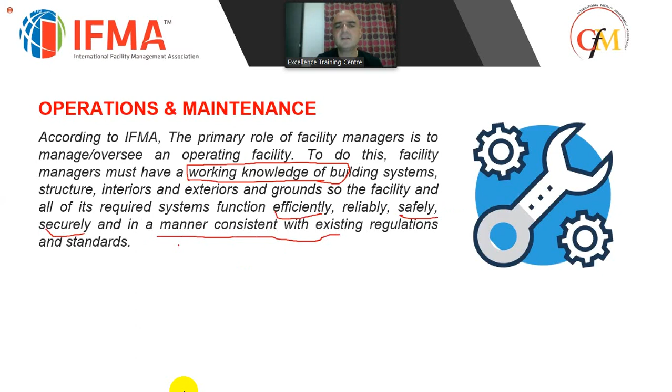So, operations and maintenance overview. What's the difference between operations and maintenance? Operations involves assuring that the facility's infrastructure provides a satisfactory work environment, complies with laws and regulations, meets financial performance goals, reflects efficient utility services and costs, and protects the surrounding community and environment. So operation is about looking at the facility's infrastructure.

So the whole facility's infrastructure, whether it's for the electric, water, or the building itself - is it a crumbling building or not? How does it operate? It says it provides a satisfactory work environment, or it might not be. In the case of an office, it can be a satisfactory work environment, but in the case of a hotel, it's what we call the mission essential function. Are we able to sustain, through our operations, the mission essential function of a hotel or a stadium or wherever?

Are we able to comply with the laws and regulations? So your operations - this is a key part of it. You cannot be expected to be a good facility manager, let's say operating in Qatar, and not really take into consideration the civil defense requirements or the Kahramaa requirements, the compliance, meeting the financial performance goals. Is my building really energy efficient? Am I really paying unnecessary costs? It reflects efficient utility services and costs, and protects the surrounding community and environment.

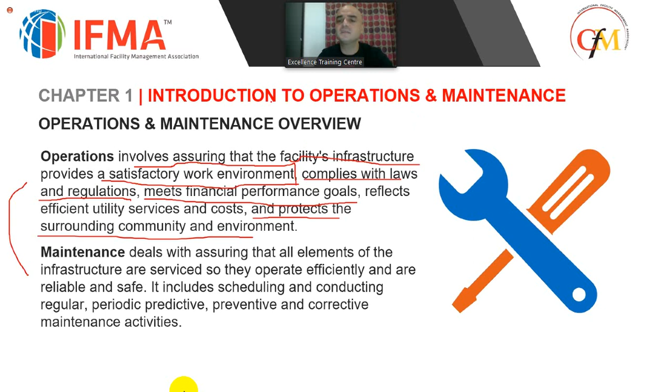And maintenance, we will see that we always prefer to make it much more routine as possible. There's always going to be some corrective maintenance, but if we're doing our preventive maintenance efficiently, we are reducing the likelihood of having unpredicted corrective or emergency maintenance.

So when we go into the systems, we start with the building infrastructure. What does the building infrastructure include? It consists of the building systems. Let's say it starts with the building structure - the structure itself, we will look into the definitions. The structure, which is the civil part, whether it's a wooden, steel, or concrete structure - this is the core of the building. This is the base, the skeleton of the building.

And then we talk about the building systems. What are the building systems? Building systems are the electrical and mechanical components of the building, or as we call them, the MEP in general. There are different types of building systems, we're going to be covering them. So if the building structure is the skeleton, the building systems are the core - they are the heart, the organs of the building. You cannot have a functioning facility without electricity running properly in it, or HVAC running through it. Of course it depends - I'm not talking about a cottage somewhere in a tropical place where you can live without AC.

But in general, functional buildings need to have these building systems in them. Interior elements—interior is also a part of facility management. This includes the furniture, the fixtures, and the equipment.

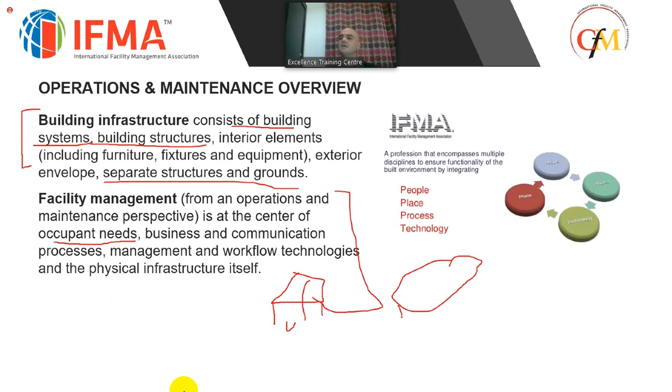If you have stadiums tomorrow for the World Cup, these are going to be heavily utilized buildings. These are going to be housing each one of them 80,000 people, with lots of systems there to secure. What's the mission essential function? It's to allow the players to have the match, to allow the spectators to enjoy it properly, to allow the TV cameras to record it properly, and to do so in an efficient and safe manner.

So it's like a huge operation, allowing people one or two hours before the match, or even more, to come and go in smoothly, go out smoothly. We have to do all of this without having security breaches or threat to the life of the people and of the players, and without having interruption.

So facility, I just gave this example—facility management is at the heart of these. If there's a problem with the infrastructure itself, if there's a shutdown in the CCTV systems, all of this will be compromised. So facility management is at the center of occupant needs. If you don't have this, you will not have the occupant needs met.

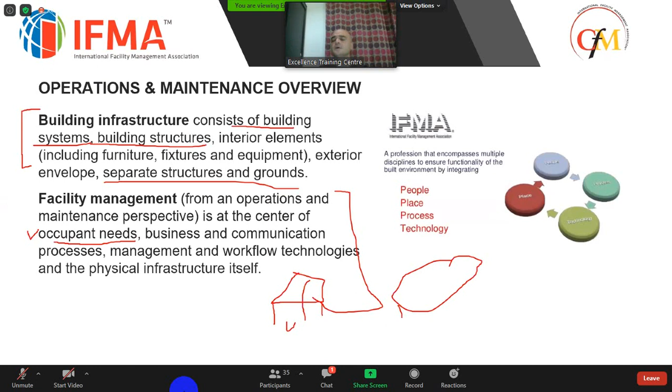Similarly, for a hotel, a 5-star hotel or any hotel for that end, a visitor is expecting to receive a certain kind of cleanliness, certain signs of noise control, smells—the whole experience. They're going for a hotel for a reason, to rest, or sometimes for recreation. So all of this, facility management is at the heart of.

To accomplish their duties, facility managers should have a detailed and complete management plan. Plans generally begin at a high strategic level and proceed to ever greater detail of tactics to accomplish the strategy.

We saw last time when we talked about strategy how we move from the general organization—what's the strategy of the organization? For example, we mentioned the stadium. So in Qatar, the strategy of FIFA and whatever—there's a certain level of quality required in terms of the operation of the facility. And because even if it's in Qatar, the country went out and beyond, and even the development of the facilities themselves, they are the first open, refrigerated or cooled stadiums in the world done at this scale. So if you look at the strategy, they want to create a wow, an impressive factor.

So for that end, the facilities are managed with that sense. They are not taking shortcuts. No one is taking shortcuts in anything. They are securing that whatever needs to be done has to be done, and that there is very low tolerance for lack of performance in any aspect.

To create O&M tactics, so we see how it goes from the general strategy up to the tactics—what are the tactics that are needed to accomplish the strategy? To create operation and maintenance tactics, facility managers must determine physical assets as an inventory, determine the maintenance and repair cycle. So we will see how, for us, to determine the tactics.

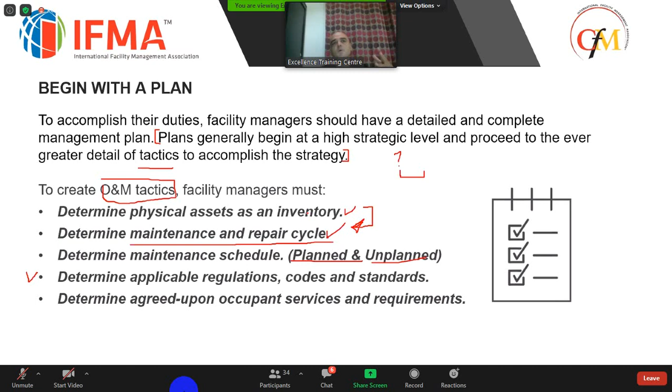So other than managing the core of the building, which is the systems, there are occupant services under facility maintenance, such as valet parking services, cleaning services, mail services, and concierge services. So what is within our scope? We determine the agreed upon occupant services and requirements—how frequently you want that, to what level, and so on.

Building structures are the construction elements that support. So we go into the definition of these items now—we start first with the building structure, the civil part of it. Building structures are the construction elements that support the architecture. They enable buildings to resist forces of users, nature, and the equipment that maintains the structure's living comfort. So it's the core structure of the building.

What do civil engineers do? They design to make sure the building can withstand the elements—nature like earthquakes, wind, rain, and the forces of users. If we are in a seismic-prone area, there are different regulations than in Qatar, for example. If I'm designing for an airport, I have much more load to take into consideration than if I'm designing an office space. So the size of the piling, the footings, and the foundation all depend on that.

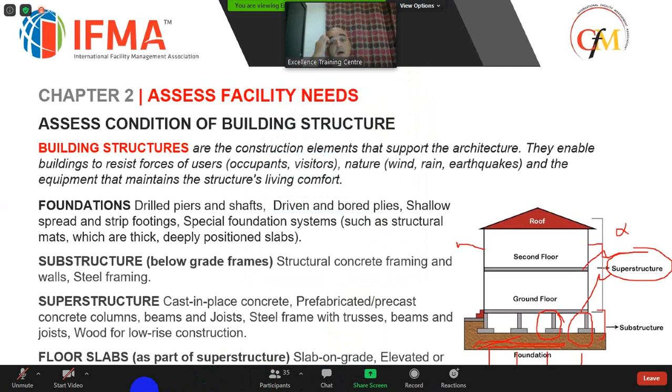When we are taking over—seven new messages, wow. Okay, means the basement, is it correct? Not really correct. The substructure means below grade, so the basement can be a part of it, okay.

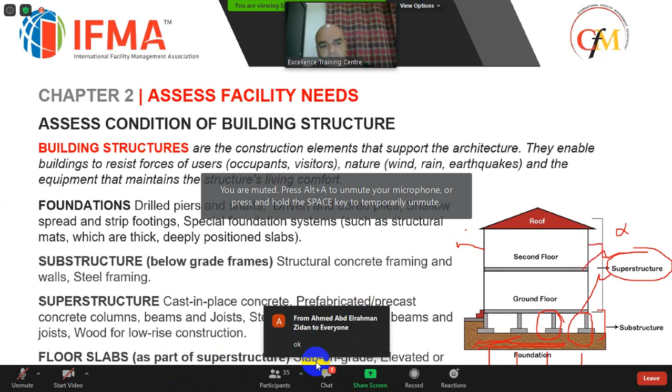Building structures are, so the first part, after we are taking over the building—the first part of operation and maintenance is that you take over. If it's a new construction and you are the developer, you take it from the contractor, and there's the defect liability period. Usually in contracting, after you finish construction, there's a defect liability period in which the contractor is bound to rectify whatever was there within a specified period—usually here it is 400 days.

Let's say it's an operational building and we went and acquired it—we were Coca-Cola, and there was a building in Qatar, and we went and acquired that building. The first thing we get is the asset list, as we said earlier. We looked at the equipment maintenance schedule. But it's very important to do a condition assessment, because irrespective of the age, sometimes a building which is 20 years old can be well maintained and will have a certain maintenance requirement going forward—very similar to a car.

When you buy a car, let's say a second-hand car, the frequency of maintenance and the way the conditions of the system will depend on the initial condition of the vehicle.

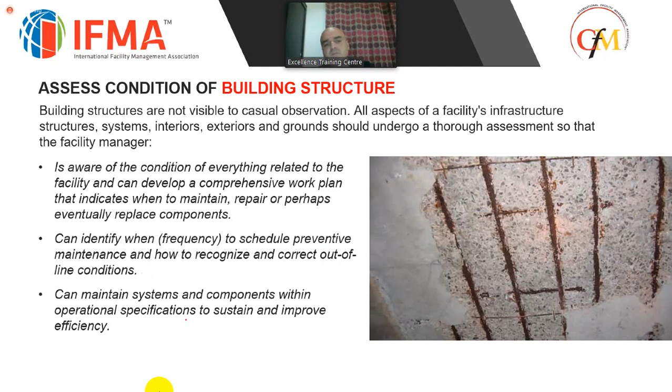Because we start from the initial condition and move on. It's also important to do that so that we can identify when to schedule preventive maintenance, and how to recognize and correct out-of-line conditions, so that we can maintain systems and components within operational specifications to sustain and improve efficiency.

You're not expected to be a specialized civil engineer, but you are expected to know the working knowledge of the terms and terminologies that we are using.

One of the most common things, as they said, is that in civil structures you cannot really see the foundation. Now you are sitting at home and you cannot see the foundation of the building. You cannot see the main wall. You can maybe observe them, but you cannot look at the conditions inside, what's happening.

But we look for signs of deterioration. These mainly happen as cracks in the interior and exterior works, cracks that are running diagonally along the mortar joints, and differential displacements of floor slabs or joints.

So if there's a shift in the structure, whether it's a steel structure or a wooden structure, again separation of corners at windows or where walls meet, standing water or pools collected near the facility during or after rain can be an indication. If we see a pool of water, why is it happening? Because supposedly when constructed, everything should be level and built in a certain inclination. So if there is pool collection, maybe there's an underlying structural problem beneath that.

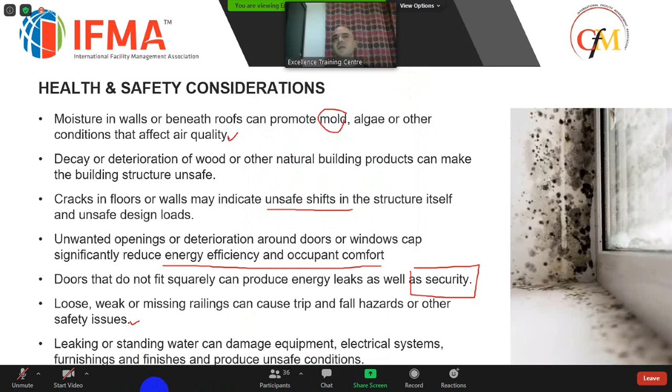Facility. Okay. Ahmad, maybe you're not having practical experience in that. All of these are under facility management. Client, someone who is running a hospital, okay, is not, it's operational now. You're used to construction sites. You know, the guy who is at the hospital, the general manager, understands absolutely nothing about facilities. So that's why he goes and hires a facility management company. And a facility management company will look at all of these things for them. Excuse me, facility management can estimate, but at the end, the facility management will not make renovation. They will try to convince the client to make a company for renovation.

Or is it from the role of the facility management under the responsibilities and duties of the facility management company? A facility management company can decide to destroy and demolish the building. They can hire the contractor. This is all under the scope of facility management. So you mean they have the authority, responsibility to say that this building cannot be lived in, we have to make renovation like that.

That's under the facility, under the authority. That's why you will see, one of the modules we were going to discuss is called project management. As a facility manager, you can be hiring other project managers. No one said that you have to do it. Some companies do it in-house, and you're saying that you need a contractor. I'm not saying no, yes, okay, you need a contractor, but who hires that contractor? Who tells the building owner that you need a contractor? Who is there every day on the building ground? Facility manager. Yeah, connection between the contractor and the client, like that.

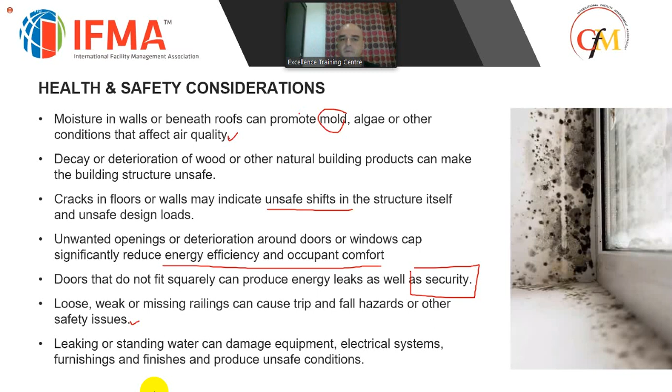Okay, so we're talking about the building envelope. This is much easier to spot the problems in a building envelope. Why? Because it's outside, it's visible. Some of it are not visible. For example, the roof conditions during rain and whatever.

So, for example, Ahmad, you can have a roof which needs a total replacement. Who can determine that? It's a function of facility management. Let's say one of the preventive maintenance that we can keep is that we can do a leak test of the roof, every 2 years. Based on the leak test, we go and say, either we need to do a partial repair or we're going to recommend replacement of the roof.

And it is gone now into operations. The building has gone into operations. It's not at the construction phase. You will need contractors, yes, not an issue, but who's handling that function is the facility management.

We're talking about facility management discipline, not necessarily the company which is handling it. So some common deficiencies to look for among exterior elements: deteriorating wall, roof, and other surface conditions. Cracks, peeling, rotting, moisture and condensation, spills, stains, ill-fitting or misaligned windows, poor joints, anchoring, ventilation, and lighting.

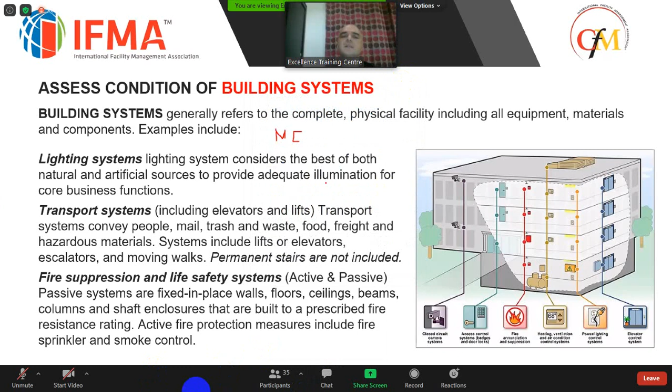So we continue, we look at the systems. These are the mechanical, electrical, and plumbing systems. The lighting system is one of them. Lighting system considers both natural and artificial sources to provide adequate illumination for the core business function. So the lighting system is not only the electrical part, the natural lighting is part of the lighting system.

Transport systems are systems that convey people, mail, trash, waste, food, freight, and hazardous material - so elevators, travelators, escalators. An important point: the stairs are not part of the transport system, as per the definition of IFMA. Fire suppression and life safety... Yes Firas? Garbage chute, is it a part of the transport system? Yes, trash. All right, thank you.

Fire suppression and life safety system - everything related to fire suppression, active and passive systems. What's an active fire suppression system and what's a passive one? Passive systems are items built into the design so they don't have to be activated to prevent a fire - this includes walls, floors, ceilings, beams. Even in Qatar, the civil defense regulates this; there are lots of passive systems. For example, if you have a genset in your building, you're supposed to put the diesel tank into a retaining wall around it, with 10% more capacity than the full capacity of the tank itself - this is a passive system, it doesn't have to be activated, it's in case there's a leak, it will contain it. Active systems, on the other hand, include fire sprinkler, smoke control, and the fire detection system - the active and passive fire alarm systems are part of this.

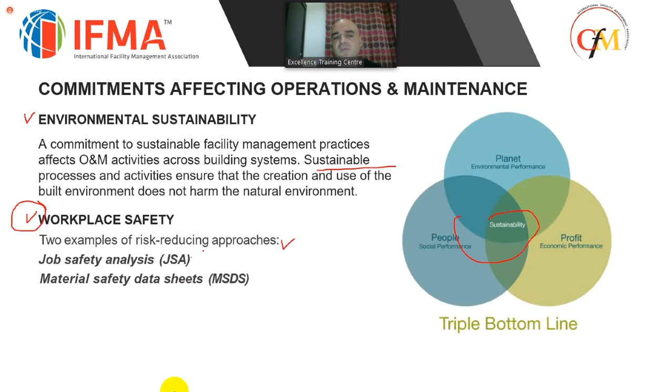So there we saw risk management for safety and job safety analysis, and the MSDS is one of the tools. We talked about the definitions in general, and now we talked about the mentality on how to handle it. Now we're talking about the other items.

So we're talking about interiors. What are the interiors? Facility interiors in general include all elements within a structure that are not actively supporting the structure. So what's an item that's not actively supporting a structure? Let's say partition walls, gypsum board walls, and so on - the partitions. They are not, their role is architectural, to separate rooms. They don't have any load-bearing part of it. So this is a definition of an interior.

A typical interior is a complex mix of different yet integrated materials, furnishings, fixtures, and equipment, as well as openings, including interior walls, windows and doors, ceiling systems, floors, and floor coverings. So any item inside the building that's not actively supporting the structure, as part of the facility, is called an interior element.

Acceptable indoor air quality - we saw in the facility module, in the sustainability module regarding the environment and quality - that indoor air quality is 2 to 5 times more polluted than outdoor quality. And because we spend 90% of our lives indoors, it's important to take care of that. It can be compromised if a building has been constructed so that air quality cannot be controlled and the amount of fresh air and humidity is limited.

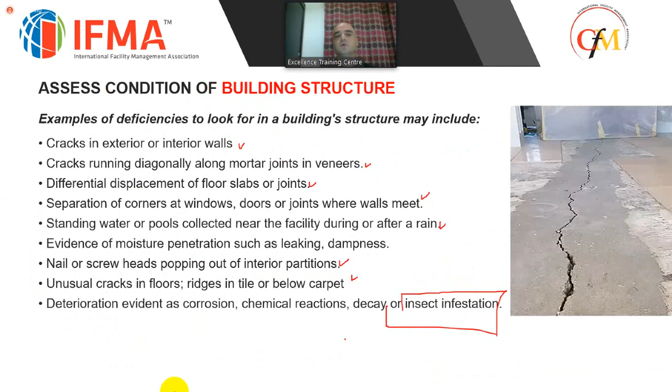So again, let me summarize. We looked at the structure itself. The structure is formed of foundations, substructure, and superstructure. Structure is the skeleton of the building.

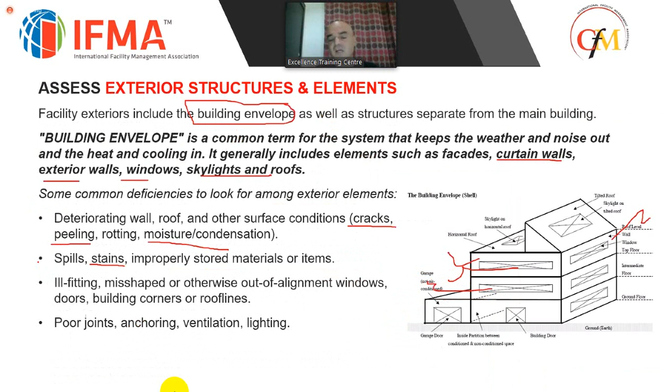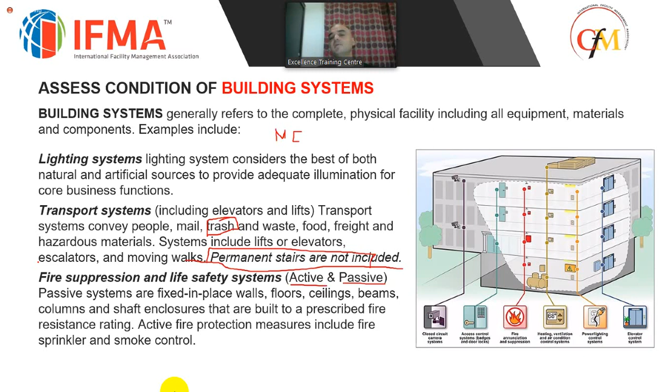Other than the structure, we have the building envelope. The building envelope is the outside doors, the roof, the aluminum cladding, the windows, the doors that are outside. And then inside of the building we have the building systems: the electrical systems, the mechanical systems, the power systems, the access control systems, the CCTV camera systems. All of these are part of the building systems.

We covered the whole building. Now we're looking at the nearby area, the grounds. The facility grounds include all exterior elements not attributed to separate structures, both landscaped and hardscaped areas.

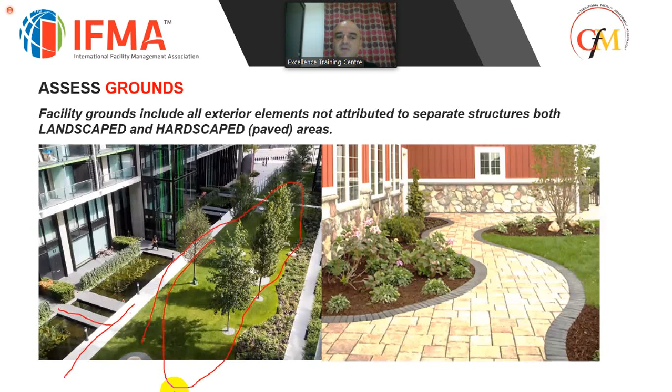Operations or maintenance are required for systems and equipment, and to support occupant need. So why is maintenance needed? Because it's made of equipment, and equipment needs maintenance—you need to check the equipment.

Facility managers refer to O&M for facility systems as hard services, and O&M for occupant need as soft services. So again, this is another definition of hard services and soft services. The hard services, per this definition, are for facility systems—things like lighting, temperature control, and so on.

And for occupant needs, such as the soft services—cleanliness is under soft services because it's related to occupant needs—mail services, valet parking services, concierge services, and so on.

Facility hard systems, such as the building structure, plumbing, electrical, HVAC, production equipment, represent a major portion of the organization's physical assets. It is the facility manager's responsibility to operate and maintain those assets. That responsibility begins when an asset is acquired.

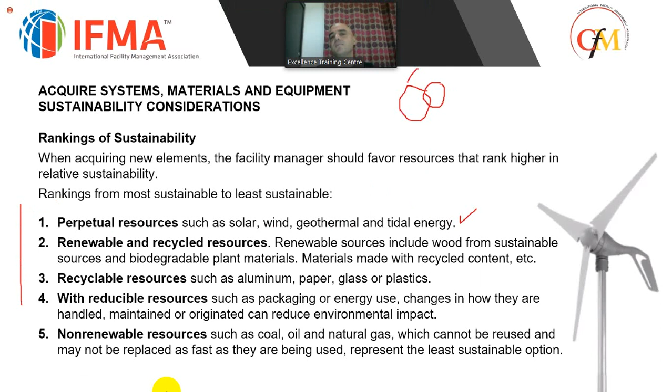So when we're deciding, we go by the rankings of sustainability. Perpetual resources such as solar, wind, geothermal, and tidal energy are our preference, of course. Remember, when we talk about sustainability, we talk about the triple bottom line. So something might be good for the environment, but might not look good from another angle.

What do you mean, Ahmed Abdurrahman? The budget of what, the perpetual? Depend on the budget, perhaps modification. Ahmed, what's the definition of sustainability as per IFMA? Sustainability, maintaining... yeah, because perhaps I have no budget for making a modification, which one is better? What you're talking about is the operations now, the decision whether to hire from outside or do it in-house. That's what you're talking about. No, what I mean is the budget is what controls me at the end, the money. If I have some budget I can make more modifications; if I have no budget, I have to restrict myself to my budget.

For sure, there's a budget for a facility—that's why you learn about facility management as a budget. Every facility has a budget, and yeah, definitely it impacts the decision. Many modifications, as you said, to a device—I can make it better, I can buy a different one, I can use more technology, more high tech.

Yeah, more, but Ahmed, you're forgetting something. The definition of sustainability as per IFMA means the triple bottom line. If you remember, it's here on the slide: profit and the economic part is one of it—it's not only about the environment. We said it should maintain the environment, make commercial sense as per your budget, and not affect the comfort of the people. That's when a practice is truly sustainable.

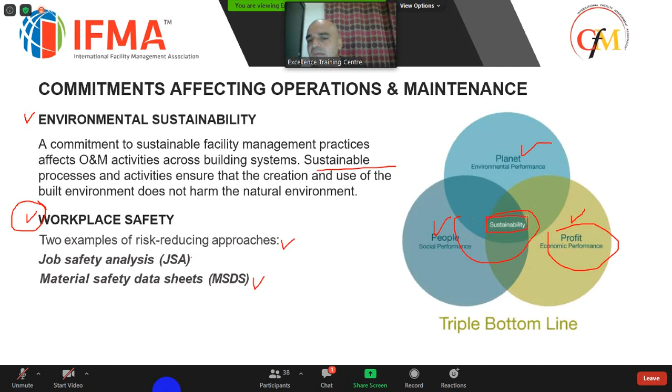Okay, so I will continue. Ranking of sustainability—it says here it should favor resources that rank higher in relative sustainability. IFMA has a very practical approach towards sustainability. They tell you to adopt sustainable practices, but of course take sustainability's full definition into consideration. As I said, if we're only looking at sustainability, then all buildings in the world would be operated by solar power because it's a perpetual, free source. But that doesn't necessarily meet budget requirements, and this is where it fails. A truly sustainable practice is one where all three elements are maintained.

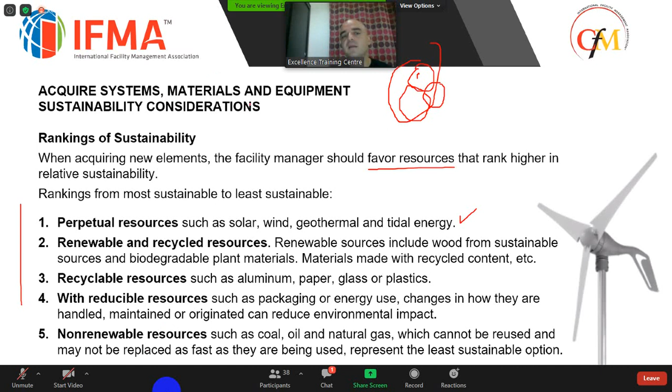Perpetual resources are the most preferred for sustainability. Then we go to renewable and recycled resources, then recyclable resources, then reducible resources—items with less packaging and how they are handled; sometimes the packaging of a material is made from recyclable items. The final and least preferred category from a sustainability perspective is non-renewable resources—coal, oil, natural gas—which cannot be reused and create environmental impacts in terms of emissions and so on.

Installing systems, material, and equipment. What's the definition of commissioning?

Yalla, Ahmed, you're coming from construction. What's the definition of commissioning? Commissioning is the same as testing.

Okay, fine. Firas, you wanted to put the definition of commissioning? I didn't come from a construction company, but I believe it's the testing of the equipment and the integrity of the equipment, if it's working. This is the commissioning.

Muthu Kumar, you wanted to give a definition also? Yeah, so commissioning is a part of transitioning a new system to operation.

Okay, let me clarify this a little. There's a misconception. Commissioning, yes, means testing - it's called testing and commissioning. But more importantly, when we are testing and commissioning, it's not only that we want to make sure the equipment is operational. Commissioning by definition is the process of evaluating, verifying, and documenting the performance of facility systems to ensure that they function to the intent of the design.

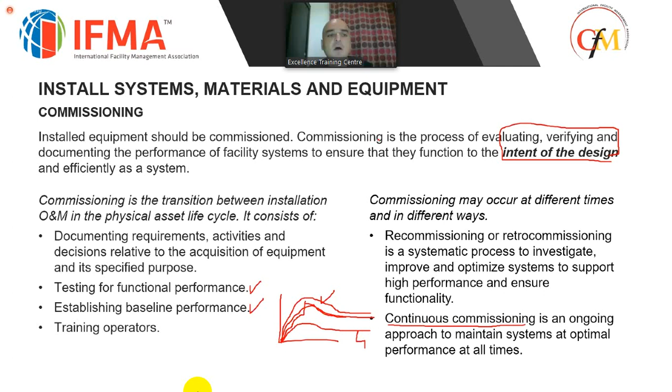Maintenance - so why do we do maintenance? What's the time now?

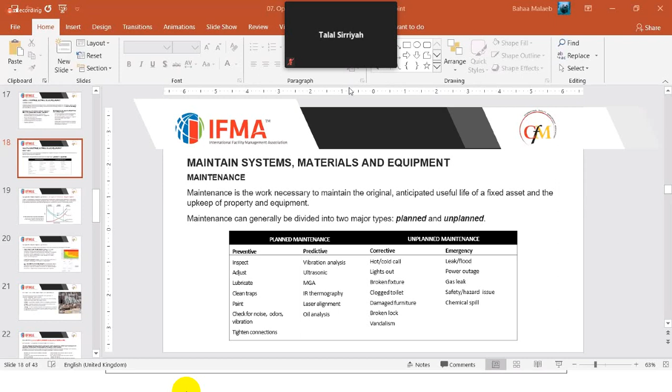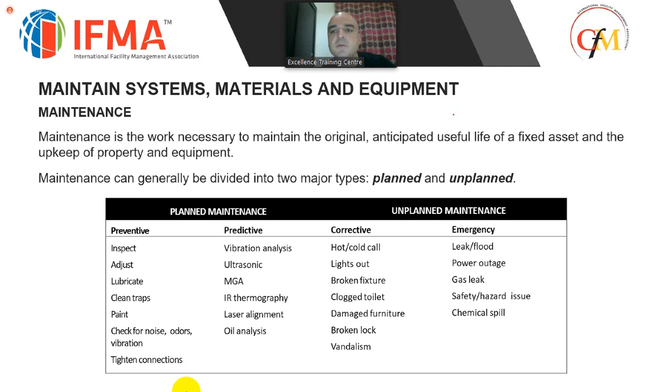What is maintenance? Maintenance is the work necessary to maintain the original anticipated useful life of a fixed asset.

So what does that mean, the anticipated useful life? When we're talking about the useful life of an equipment, everything has a useful life. It means how much do we anticipate for it to be useful, like an average time for it to operate. So there's a useful life for any equipment that you buy.

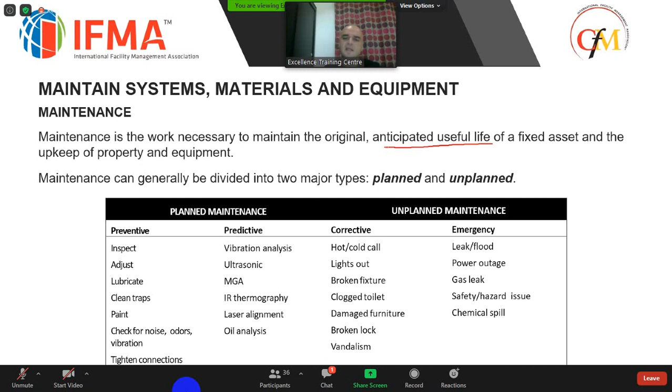It can change depending on several things. If it's consumer goods, for example, a mobile phone has an anticipated useful life, after which, although it will still be functional, people change it not because the equipment stopped operating, but because the technology has become obsolete. So there's an anticipated useful life.

That's why we do maintenance, to maintain the original or anticipated useful life of a fixed asset. So let's say we are expecting a chiller to have a practical useful life of 20 years. That's why we do maintenance, to ensure it will last for this much time or this many hours of operation.

There are two general, major types of maintenance. We have, and I mentioned this in the beginning, planned maintenance and unplanned maintenance. Planned maintenance is what we usually call preventive maintenance, so we are doing it ahead of time.

This is where you take your vehicle and every certain hours of operation or months you do a planned maintenance. You inspect, adjust, lubricate, paint, check for noise, odors, vibration, tighten connections. In terms of equipment, the planned maintenance means you check system components, the level of oil, and if it's an electrical system, you check the connections and so on.

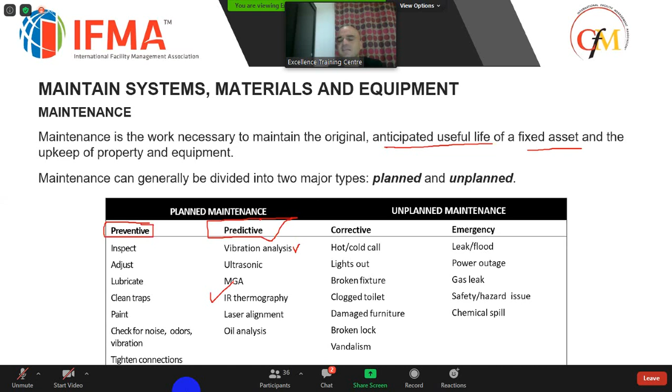Infrared thermography, for example, can show us - all of these non-destructive tests that we can do in order to understand the condition we're in. Another example is the oil analysis of an engine - we take the engine oil and check it out. It's one of the predictive maintenance methods; details are there, definitions up to finite detail in the book on each and every one of those.

Corrective maintenance, yes, Sheikh. So, as I can understand, predictive maintenance is part of preventive maintenance, like vibration analysis would be part of inspection or that kind of thing, or is it done separately?

These are examples. This can be a part of the preventive maintenance also. But predictive maintenance is that we are trying to analyze what phase we are in - what's the condition of this equipment?

Is it, for example, like predictive maintenance that you do when you go buy a second-hand car? Usually they do a CO analysis for it, right? They check the emissions of the vehicle. Why do they check the emissions? Because looking at the emissions, they can give you a condition assessment, and they'll check several things and tell you your car is 98% meeting the original condition, or it's 50%.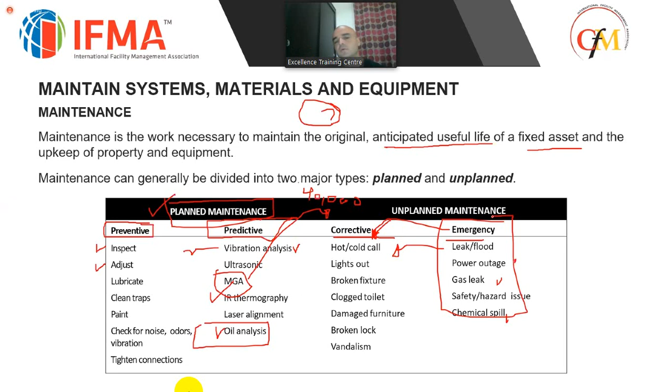Emergency situations like power outage, gas leak, chemical spill - these are corrective maintenance but with very high, immediate priority. Corrective maintenance also includes things like a tile falling off that you need to correct, a clogged toilet, damaged furniture, broken lock, vandalism, and so on.

Why don't we do maintenance all the time, if maintenance is so important? Why don't we invest more time in preventive maintenance? The reason is that although an organization should have more planned maintenance than unplanned, it's not prudent for a facility manager to strive for 100% planned maintenance. Usually in our planning, we aim to increase planned maintenance and reduce haphazard unplanned maintenance.

But there's a point after which increasing planned maintenance won't be cost effective - the labor hours spent in operation maintenance generate an opposing cost, and there's a point of diminishing returns. Similarly, why do we change the oil in our vehicles only every 5,000 or 10,000 kilometers? Wouldn't the engine run better if we did it every 2,000? Hell yeah, it would. If we did maintenance every 2,000 kilometers, it would run much better.

And we can go and do it, but we'll be spending more money, which beats the purpose. There's a point where it becomes too expensive to maintain, and it's better to let it run and fail. That's why, for older vehicles, many people don't go to the authorized dealership anymore, because whatever they'd pay in preventive maintenance would be offset by the high fees from those people. Similarly for equipment, we have something called reliability-centered maintenance.

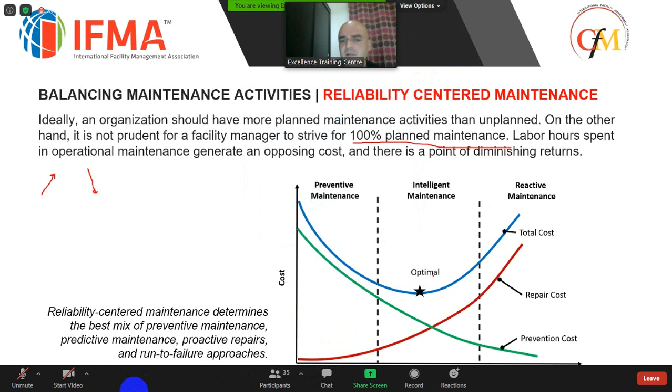Reliability-centered maintenance is about the optimal point, the optimal balance between where it makes sense to invest in maintenance versus the actual cost of maintenance. If you look at high preventive maintenance, the prevention cost is high, right? And the repair cost is low because I'm doing more preventive maintenance. On the other extreme, if I'm running totally on reactive maintenance, I'm using a run-to-fail system.

I will not touch my systems, I will not touch my HVAC systems, I will not touch anything. The prevention costs will be very low because I'm not investing in maintenance, but the repair costs will be very high. Imagine you don't do any preventive maintenance for your vehicle - do you consider that reactive maintenance as corrective maintenance? Yes.

Usually it is. What does it mean, reactive maintenance? You have something broken down, so it means that you are doing a corrective maintenance. So it's the same definition. Reactive maintenance is when you are having a run to fail thing.

In between those two is where the question that came earlier applies: how do I know what's the maintenance schedule for it? Usually manufacturers look at this model. They consider a point after which the client is not going to pay more money. Preventive maintenance - no car manufacturer will actually... now they're working on improving their systems up to a point where they reduce the maintenance frequency.

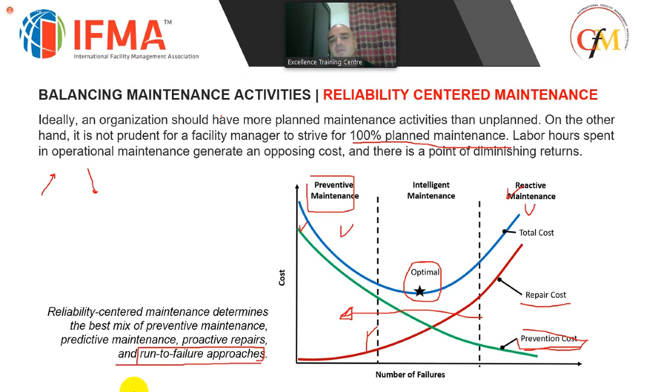But once you're talking about huge facilities, once you talk about a university, you cannot run on a reactive maintenance principle - otherwise it's going to be a nightmare. Otherwise, you're going to be decimating the life of your equipment. And if an equipment is supposed to last for 50 years, by an approach of run to fail, it's going to fail even less than half of this.

There are many tools to maximize reliability and performance at the lowest cost, including failure modes and effects analysis, FMEA. The facility manager evaluates work relative to dollar value, work complexity, occupant dissatisfaction, and criticality to occupants, the facility, and the organization's mission. Criticality can be ranked as values of most critical to least critical to the facility mission and strategic plan. So one tool that you can utilize as a facility manager is deciding based on your tolerance.

For example, to me, a very critical thing for occupants is the HVAC system, so I will only focus on that. And whether they say it or not, different organizations adopt the same principle here.

If you look at smaller compounds, the items which they maintain, they don't really invest in doing more than the basics. At the basic level, they make sure that they are complying with the QCD requirement, because it's a regulatory requirement, and if they don't do that, someone is going to go to jail. So the QCD requirement - they do the fire check, fire alarm, once every year. They take care of the AC maintenance once a year. But other than that, the rest of the systems go on a run to fail mode.

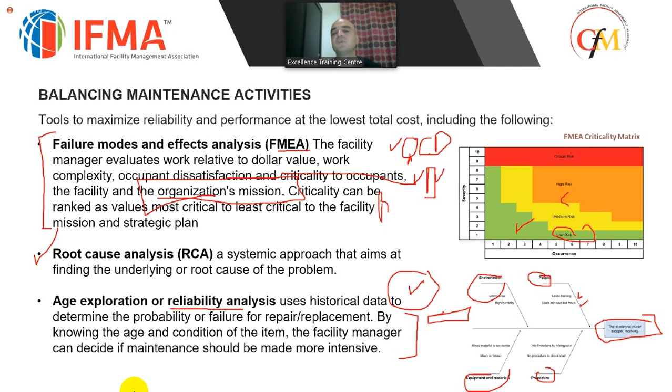You can buy a second-hand car, test it out, and they tell you it's still in very good condition, then you don't need to take additional measures. Or they can tell you, okay, be careful, for example, the hydraulic system is not there, so maybe you do more maintenance for that in terms of equipment.

Well, replace systems, materials, or equipment. Replacement is an integral part. Sometimes we have to dispose of equipment or replace them.

Sustainability options are that we can reuse, which uses a product more than once, such as using maintenance rags rather than paper towels, or reduce, in which the quantity of item outputs is decreased. So either we reuse, reduce, recycle, or salvage.

Salvage is the process where we take the material and reapply it for another purpose without being recycled. For example, I remove the doors from one area, cut them, get the wood out of them, and utilize them as a fence for one of the building groups. This is what's called salvaging.

Recycling is that we reprocess it into a new raw material. This is the difference between the two. Recycling is, let's say I have a glass door, I take it and they melt it down and use it on something else. Salvaging is that I reapply it in a different way.

I remove the steel structure which was in the parking lots, cut the pipes, and made out of them a fence for the generator area.

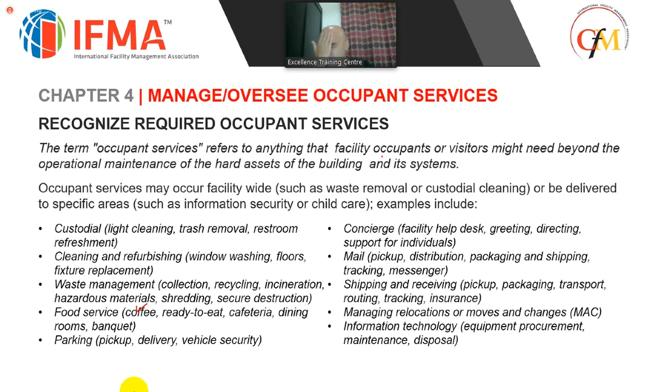So there is a huge range of services that can be provided, depending on the facility. I gave an example, Qatar Foundation, which has tens of buildings, and different buildings offer different things. Many cafeterias and catering in different buildings, many parking areas in different buildings. Cleaning is very common, and hard maintenance is very common. Some areas have a concierge, which may be under facility management or under the management itself.

We talked earlier about integrated facility management. Integrated facility management is a concept where companies provide a full solution under one umbrella, including the hard and soft services. So it includes everything from A to Z, and this is a concept which is gaining traction globally.

While facility managers may not be responsible for deciding which occupant services are provided, they are responsible for assuring that the desired level of service and the right mix of service are provided. So facility managers might not decide on the services, but the desired level. For example, we need a valet parking service to ensure that your vehicle gets retrieved within 3 minutes.

This is a measurement to determine a guideline for occupant service performance: we identify the needs and expectations. So if, let's say, they put the cafeteria under us, what do they want? What kind of food? How diverse? What's the price range, and so on? Then we evaluate needs, implement the plan, and measure performance.

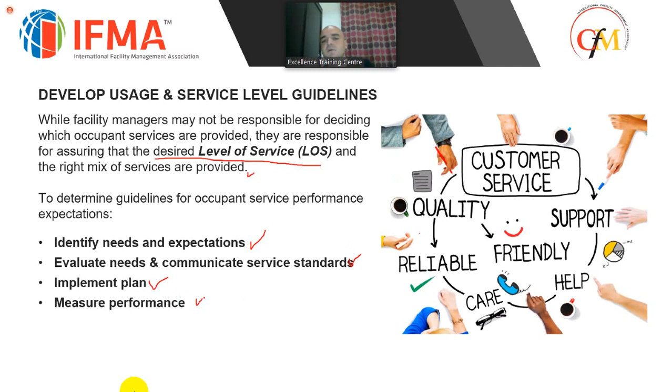Facility environment priorities: the facility manager may determine how to measure for quality by applying guidelines. I mentioned last time, and there'll be a different module regarding quality, and I like to repeat things which I find are stressed by IFMA.

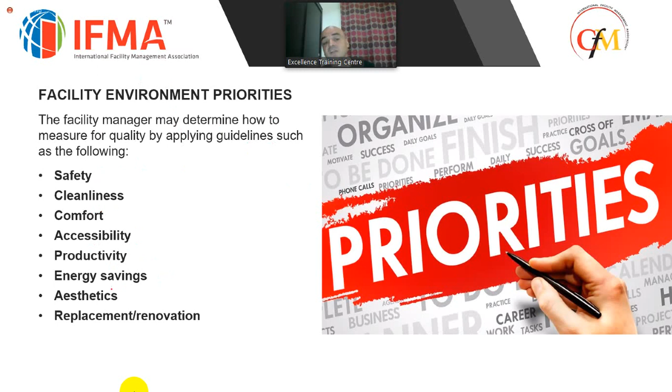Quality is determined by the customer, not by the facility manager. But it's the job of the facility manager to understand what the customer wants, needs, and expects. The facility manager may determine how to measure for quality by applying guidelines such as: safety, cleanliness, comfort, accessibility, productivity, energy savings, aesthetics, and replacement or renovation.

There are several kinds of system considerations that affect work priorities: best mix of reliability. So the priorities can change—reliability, productivity, maintainability, redundancy, and instructions are to be utilized in a work plan to decide the priorities.

Execute modifications to occupant services. The alterations refer to the work required to change the interior arrangement. This is a very common thing done by facility managers. Alterations and changes happen more frequently, especially since we're not limiting facility management to just one building—we're talking about bigger facilities as a rule of thumb.

Alterations refer to the work required to change the interior arrangements or other physical characteristics of an existing facility or of installed equipment. Alterations may include what's referred to as improvement, conversion, rehabilitation, remodeling, or modernization.

Sometimes it can be for aesthetic reasons. Sometimes the change can be for a functional reason, like having a studio that we want to change into a lab inside a college, or modernization—our library has become obsolete and we need to modernize it, including smart systems to manage it.

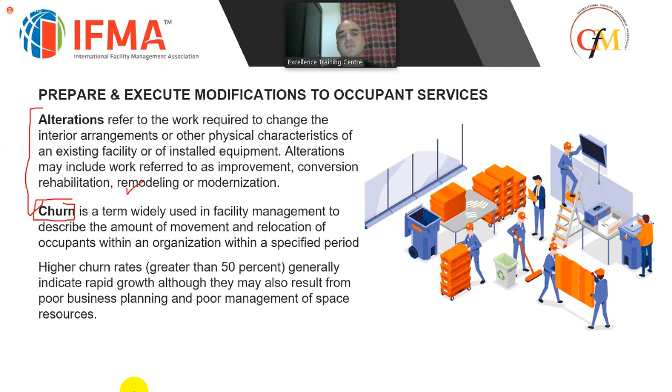Churn is a definition I've mentioned several times, and it's an important term for you to know. Churn describes the amount of movement and relocation of occupants within an organization within a specified period—the rate of movement and relocation of occupants.

High churn rates generally indicate rapid growth. So in a company that is growing rapidly, they will be changing offices more frequently. But it can also result from poor business planning and poor management of space resources. If there's proper planning, the churn rates should be reduced; if there's improper planning, churn increases.

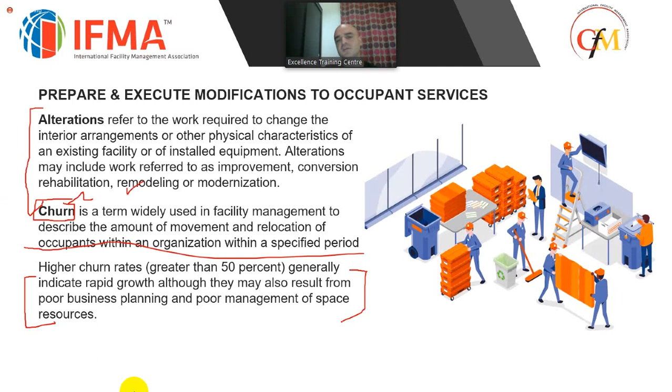We are a changing organization: one day we take an office thinking we're going to be expanding, so we go hire a more expensive, bigger office space considering future growth. Then a year down the line, we find out we actually need to shift to a smaller office, and so on. So proper planning makes it much better.

Selecting the best resources, we talk about service level agreements. A service level agreement is part of a service contract. When you talk about hard contracts, you talk about general contracts, and service level agreements are agreements you sign usually for soft services. So a service level agreement is part of a service contract in which service expectations are formally defined.

A basic service level agreement contains these elements: statement of works. What are the works that are going to be involved in it? For example, a service level agreement for the cleaning of Hamad International Airport.

The level of service: what kind of level of service we are expecting. Measurements: how are we going to measure the performance? We'll see that there's descriptive or prescriptive measurement. That means I'm going to rate you by the number of people, so I'm expecting you to provide, let's say, 200 people, and to do the routine by doing so many visits to the toilets every day. I'm expecting that anytime a random inspection happens, a certain level of cleanliness is ensured. Oversight measures: let's say in case of spillage, within 20 minutes or 2 minutes, you should send someone to go clean it.

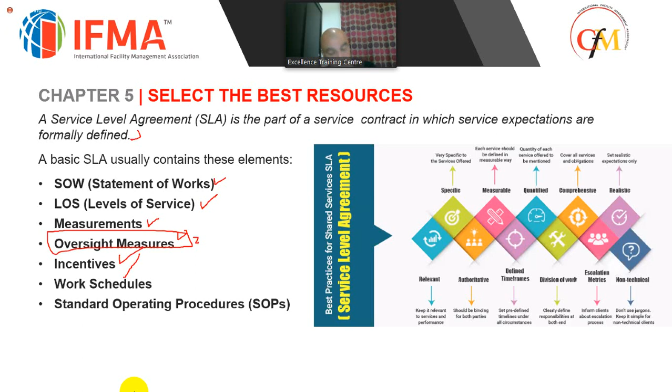The work schedules can be identified in the service level agreements. For example, cleaning of the airport, we're expecting you to have a team 24 hours, and on holidays to include more people because we are expecting more traffic to come to the airport. Standard operating procedures: how you operate, what's the modus operandi.

Select competent service providers.

Outsourcing - what does outsourcing mean? Well, outsourcing is another term for subcontracting, or giving it out rather than doing it internally.

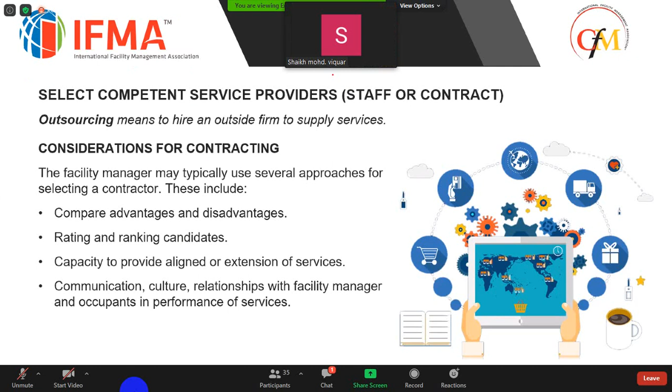Someone open their mic. Hello. Yeah, okay. Can you please elaborate on oversight measures? I didn't get it. Oversight by definition means - what do you mean by oversight?

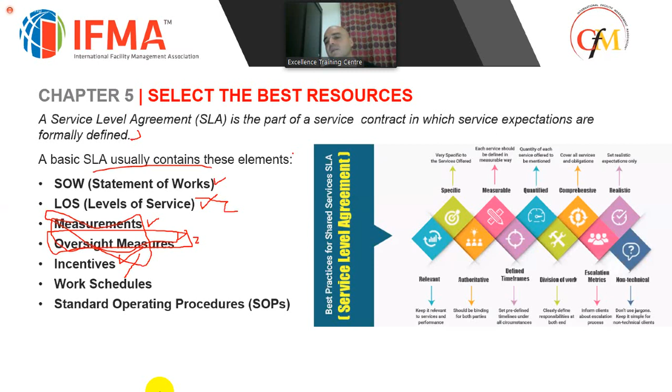In case you did something wrong, an unintentional failure - so let's say you are supposed to maintain something, what's the penalty? Let's say this is oversight measures, for example penalty or corrective action. Let's say you miss the PPMs, you are expected to rectify the situation within 24 hours - this is what oversight measures means. This is usually contained in contracts; it can or cannot contain this, but usually contracts will include, if failure for you to do this, you're expected to do so and so - a corrective action within 24 hours. If not, you will be subjected to a penalty or maybe terminated. So this is the oversight measurement as meant here.

Considerations for contracting - outsourcing means going out. What's the difference between a service level agreement and a KPI? A KPI is part of a service level agreement. A KPI is the key performance indicator. A service level agreement means a contract for services. The KPI is a part of that contract.

So I hope Isaac that answers your question. Yeah, I get it, okay.

Considerations for contracting - why do I go outside rather than doing things internally? There are many reasons for us to use that, and there are advantages and disadvantages for it.

Capacity to provide aligned or extension of services, communication culture, relationship with facility manager in performance of services - usually it's like the make or buy situation. Why do we need to contract or take internally? Depends if I have the skills in-house, how frequently am I going to do it, how critical it is for my operations, and so on.

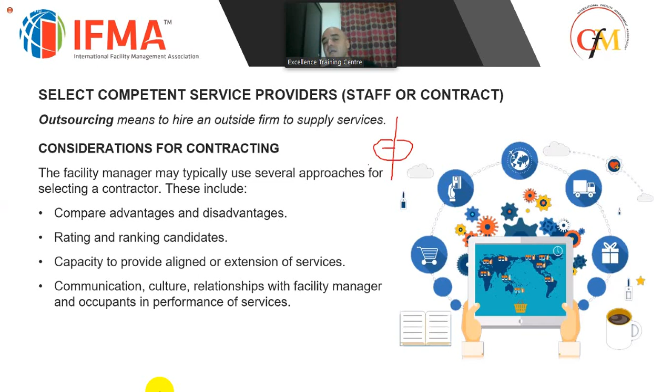How specialized am I? For example, with elevators, facility management companies usually give the elevator part of it outside. They give it to the specialist because the specialist is much more trained and better equipped to handle this. They have access to spare parts, they're doing hundreds of elevators outside, they are much better. Gas systems is another one, BMS systems depends - it's about the criticality and the advantages and disadvantages.

So there might be cost control if I go outside - it can be cheaper for me. For example, with elevators, for me to get the same level of service if I want to do it internally, it costs me much more.

Disadvantages - so all of these make sense, why will I go outside? Sometimes it's better cost control, we're going to more specialized people, I don't need to do everything in-house. I have flexibility - today I need 200 cleaning people, tomorrow I need 300. If I'm going outside, I'll be able to manage this and reduce and add as I want, much easier than if I hire them.

Disadvantages: lack of loyalty. When I'm hiring outside there's a risk of lack of loyalty because the contractor is there to make money, whereas my employees are there to serve the company. A loss of immediate control, no ownership means that loyalty isn't there. Different agenda - money for the contractor, unfamiliar with the business culture.

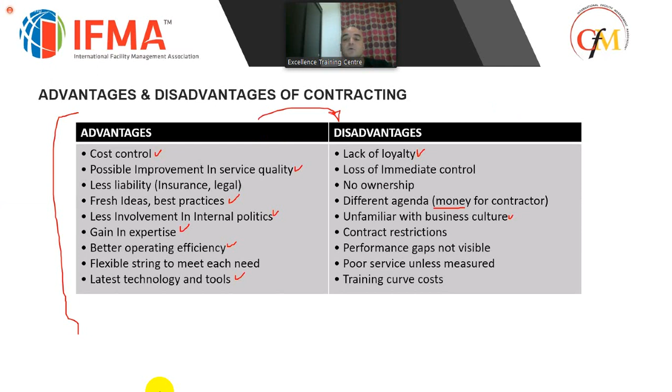Negotiations - you see how IFMA brings everything integrated all over again. We talked about this in communication, we talked about this in managing human resources. In negotiating contracts, there are different ways.

Win-win, win-lose, lose-win, or lose-lose. Everyone ideally talks about, oh it's a win-win situation. What's a win-win situation? It's that we go for the basic assumption that you and I can work together to ensure that we both benefit from the negotiation.

Win-lose or lose-win means one party will come out winning. In a win-lose, I will only come out winning from this. Lose-win is that I've been set to lose this negotiation, like my arm is twisted, but I will go down fighting. Lose-lose, neither of us will benefit from negotiating, but I will still put up a fight.

Needless to say, we try to make our relationships with our suppliers a win-win case, and many people don't see that. Many try to negotiate from a win-lose situation - it means okay, I will make the money, I will do all the savings, and I will screw you. If you do this to your suppliers, you're not going to get proper loyalty from them, you're not going to make yourself their preferred client.

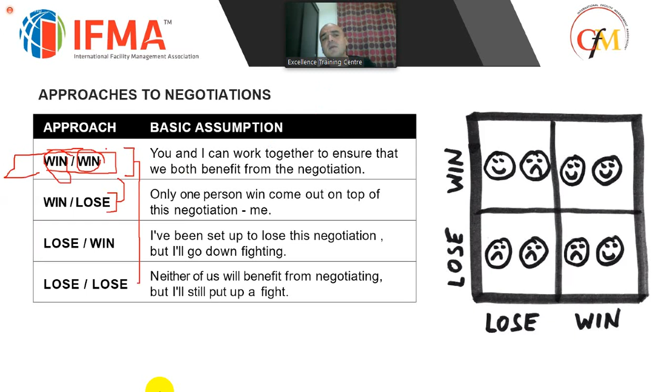So it's always better to take into account the needs of the other party to still make a profit and still be happy about the deal. This is where smart management comes into place. If you're only looking at screwing them and squeezing every penny, you will not be their preferred choice. Maybe if they are happy with your service, making a reasonable profit, they will be more reactive to you and support you better.

The service level agreement is a useful tool to monitor work and identify discrepancies, because it's a baseline for the dealing between me and the contractor, whether the work is performed by internal or contracted service. So the service level measures the level of performance that I expect.

Incentives - we talked about incentives and penalties. Contracts can be reward-based and may offer incentives for meeting work requirements. There are certain incentives, such as a cost plus contract - this holds the contractor to an agreement on maximum expenses and rewards with a bonus when costs remain low. You don't see much of these types of contracts in the local culture. Cost plus award is that usually the costs are fixed price.

There are some fixed price incentives. In what sense? They will usually depend on that—they will sign with you a 3-year contract, and it will be negotiable, renewed automatically, or a 1-year contract renewed automatically if your performance meets a certain criteria. This is an incentive for you to provide good performance. A fixed price incentive provides added remuneration or other incentives if the contractor meets or stays beneath a targeted cost.

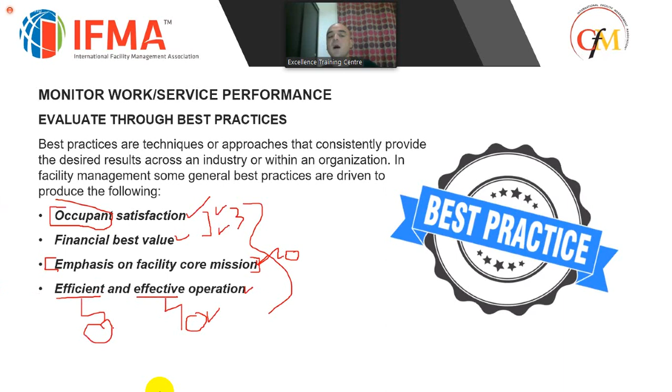Effectiveness means that we do what's needed and what's intended, and it's effective—it gets the result done. Efficient is the cost aspect of it. How efficient are we? We've seen it even in terms of the design of the workspace.

Resolve contract disputes. Contract disputes happen, and the best way to resolve contract disputes is from the design of the contract itself. Proper contracts, or most proper contracts, anticipate a dispute from the beginning.

A well-crafted service level agreement or contract gives both the supplier and facility manager the basis for discussing a conflict, with a clear statement of work and complete terms and conditions. So usually there'll be an escalation clause—in the case of this, we hire a third party, we do some third party negotiations, and if not, we go to arbitration and legal course of action. The legal course of action will be in Qatar, for example, as per the Qatari law, or can be under international law in a different jurisdiction.

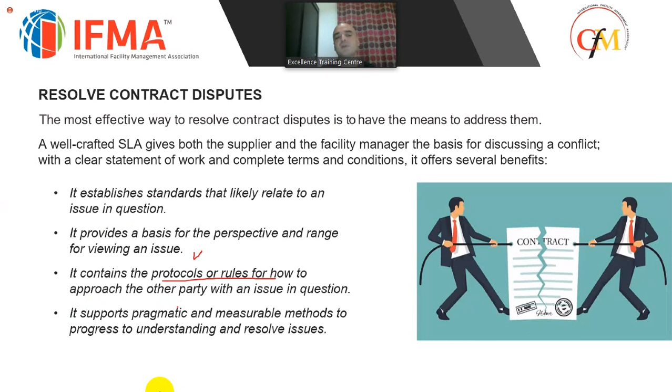It's better if we have the mechanism to handle this. I've seen contracts where people suggest, if they're not able to resolve it, we will hire a third party to come and mediate. The benefits of it are that it establishes standards that likely relate to an issue in question, provides a basis for the perspective and range for viewing an issue, contains the protocols or rules for how to approach the other party with an issue, and supports pragmatic and measurable methods to progress and resolve issues.

Measuring performance and maintenance, operations and maintenance performance—the life cycle cost analysis. We talked about this in the financial sector, the financial module, the life cycle analysis and the total cost of ownership. These are tools we consider when we are considering the purchase of equipment or an asset—we're considering the total cost of ownership.

We're talking about the cost from—what did we call it?—from cradle to grave. So from the beginning itself, what are the costs in terms of research and design, the tooling, equipment, evaluation, then the overhead cost and the purchase cost, and then the utilization cost, and even the disposition cost. Disposition cost, the maintenance, the learning curve, regulatory requirements, and so on.

So we're talking about the life cycle cost analysis, LCCA. Total cost of ownership is a financial management strategy that accounts for the complete life cycle, cradle to grave measurement and management of a physical asset's useful life. It's a very important tool for us to utilize in facility management, because in facility management we're looking at the lifespan of this.

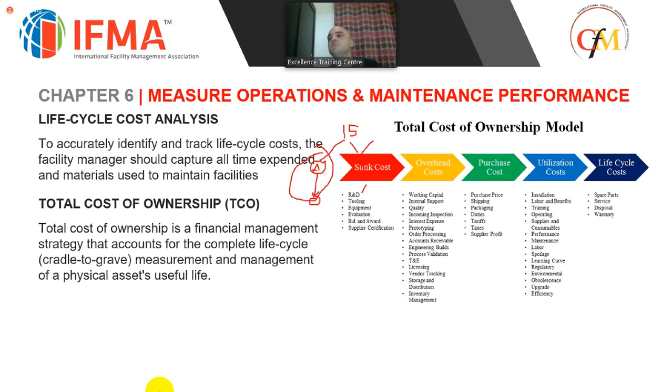This is the concept, maybe you joined in later, Firas. I see there's a tendency, due to the nature of the work here in Qatar, many of the class members are coming from a construction background. It's a totally different mentality than when you're looking from facilities. Even facility management in the concept here is not the contracting service of facility management. We're talking about facility management about managing the facilities from a client perspective, because in the end, that's how it should be. Yeah, clear, okay.

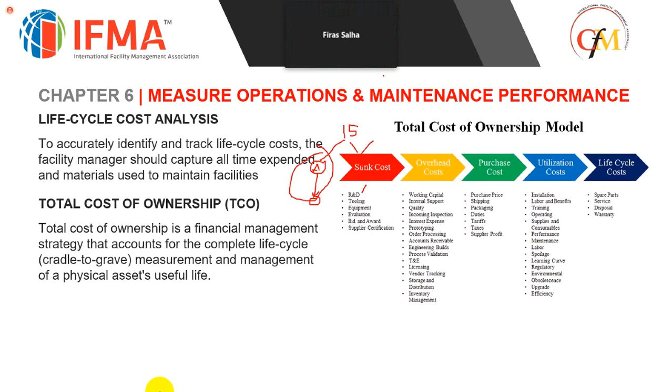So when we talked about the asset useful life, same equipment, different brands will have a different asset useful life. The useful life refers to the generally expected time that the component can be left in service before it will start to experience a rapidly increasing probability of failure.

So that's why we call these degradation curves. The degradation curves estimate the rate and probability at which a component, piece of equipment, or system may continue to meet or achieve its intended function.

So if we have the same item, let's say a generator, you can buy Cummins. Those of you who know gensets, Cummins is one of the best generators in the world. Or you can buy even Rolls-Royce, let's say. I don't know, Rolls-Royce generators, they make very good generators by the way, but they make more turbines I think, I don't know if they're making generators now. Or you can go for a Perkins, and you can go all the way to, let's say, just consider that.

So Rolls-Royce might have a better long life asset. The medium one will have a medium life asset, versus you can go and buy the same equipment from a cheap Chinese manufacturer - with all respect to Chinese manufacturing, but many of them can give you a short life asset. If you look at the functional failure, in a short life asset, after a certain time the probability of failure becomes higher. In a long life asset, the condition gets prolonged, and the better the equipment, the longer the curve is going to be, versus having a sharp drop.

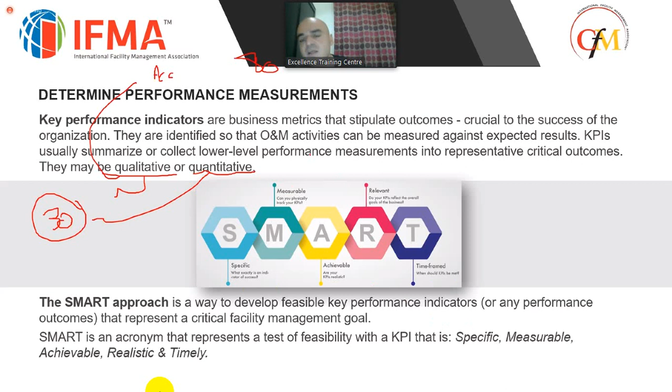The SMART approach is a way to develop key performance indicators that represent the critical facility management goal. SMART is an acronym for specific, measurable, achievable, realistic, and timely. We cover these SMART goals for personal goals as well, and they apply to facilities - whenever you set a goal, a golden rule is to utilize SMART goals.

Another tool is to use the balanced scorecard. We see this model coming over and over again, and it measures performance not only on the financial aspect - you need to look into it from the customer side, from the employee side for learning and growth, and from the internal business process principles.

We've covered this in depth in other modules, but here again, in terms of operation and maintenance, everything can be consolidated under a balanced scorecard.

The balanced scorecard views the organization from four perspectives: stakeholder measures that reflect the satisfaction of customer or occupant - this is the customer in this case; internal measures that reflect performance of key processes; learning and growth measures that reflect the organization's learning curve or capabilities and position; and the financial measurement.

The balanced scorecard always considers that financial measurement alone is a hindsight. In the end, it's a very important thing, but for us to continue the longevity of a business - you have businesses such as Coca-Cola who have been running on this planet for more than 100 years. They've done that not only by focusing on the financial bottom line. Of course it's very important and clear, but they focus on other things too.

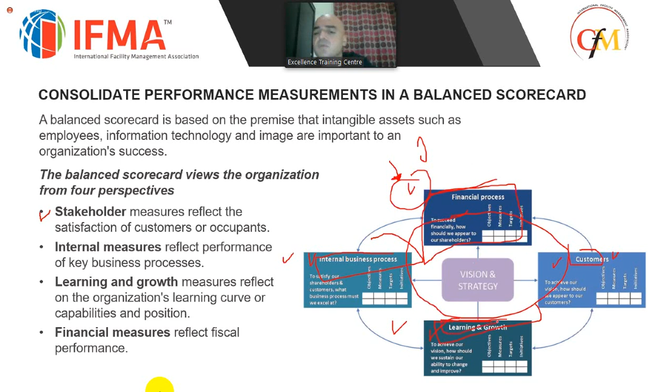They focus on their customers, making sure their customers are always satisfied. They focus on their internal business processes, their employees, and learning and growth. This is what the balanced scorecard focuses on.

Monitor occupant satisfaction - quality occupant service is motivated and determined by several considerations. I have always said that occupants and customers determine what defines quality, not the facility manager or owner. You can say you have the most comfortable hotel in the world, but it might not be remotely related, and you might genuinely think you're providing the best service, but it's not you in the end who decides - it's the client and the visitor who decides.

There should be continuous improvement. There's a separate module for quality, and that's why it's very much integral to IFMA. Quality is not a goal which you reach - quality is centered on continuous improvement. Perfection is never reached; it's put as a model, but it's a continuous moving circle.

The facility manager and owner executive need to be willing to measure occupant satisfaction. Certain things are taken into consideration to secure the proper environment for quality - there should be a commitment to measure occupant satisfaction and understand the importance of it.

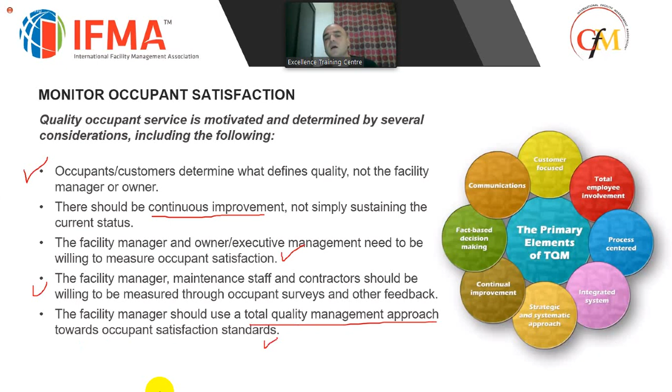The facility manager, maintenance staff, and contractors should be willing to do that. The facility manager should use a total quality management approach, TQM, towards occupant satisfaction standards. As I said, it's critical, what you are providing in whatever you're doing, and that's why there's a separate module which discusses quality.

When we were discussing previously, I mentioned the top complaints that happen, based on research in facilities. Number one is that it's either too cold or too hot. Second is poor indoor air quality, like there's a smell or something. Cleanliness is very important, and again there are a lot of complaints on that. Other than that, there's no privacy, not enough conference rooms, inadequate parking, computer problems, and too noisy, high noise levels.

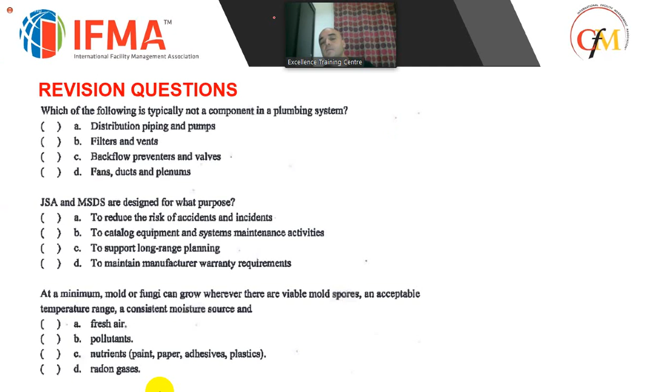So that was it for tonight. We will go through the questions now. Which of the following is typically not a component in a plumbing system? Option D, Delta. Correct.

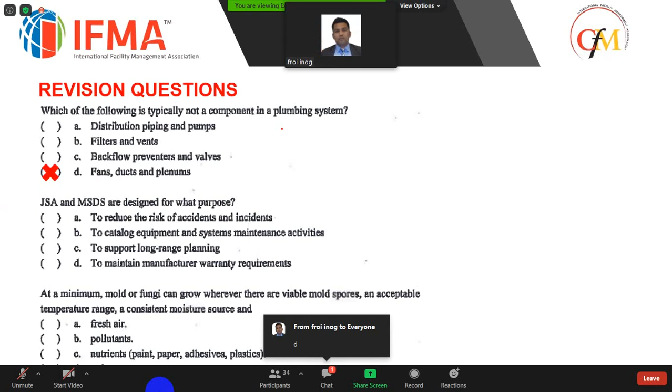Second question. JSA, which is the job safety analysis, and the material safety data sheets are designed for what purpose? Alpha, option A. Yes.

At a minimum, mold or fungi can grow wherever there are viable mold spores, an acceptable temperature range, a consistent moisture source, and... nutrients. Option C, nutrients.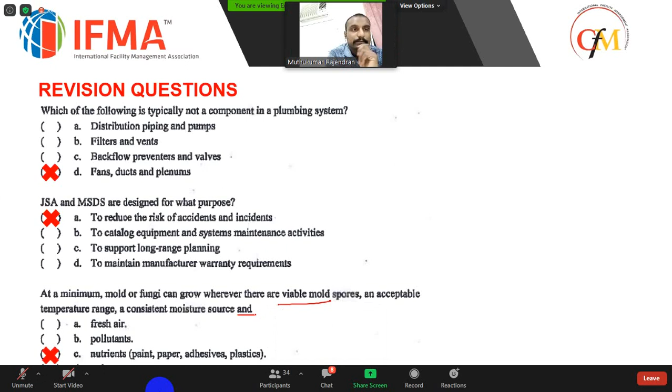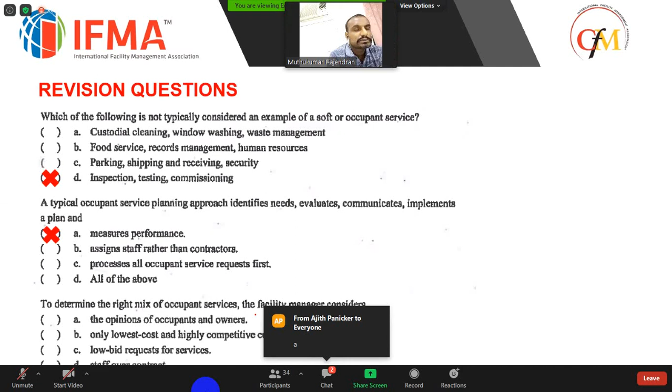To determine the right mix of occupant services, the facility manager considers the opinion of occupants and owners. Alpha, the opinion of occupants. Okay, it's true. What do you mean by the right mix?

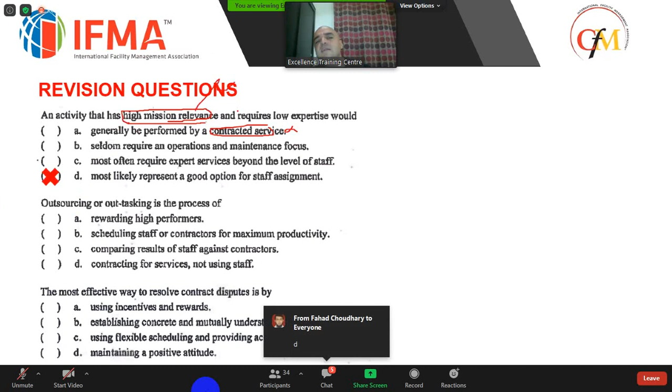An activity that has high mission relevance and requires low expertise would most likely represent a good option for staff assignment, rather than contracting the service. High mission relevance means it's very critical for us, and since it doesn't require specialized experience, it's better to do it ourselves rather than giving it outside.

Outsourcing or outtasking is the process of contracting for services. Option D, contracting for services. That's easy.

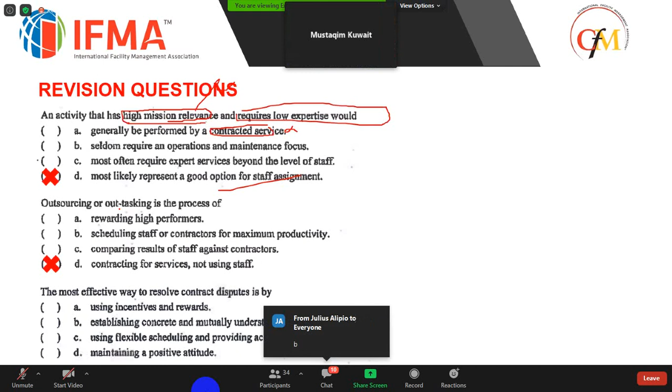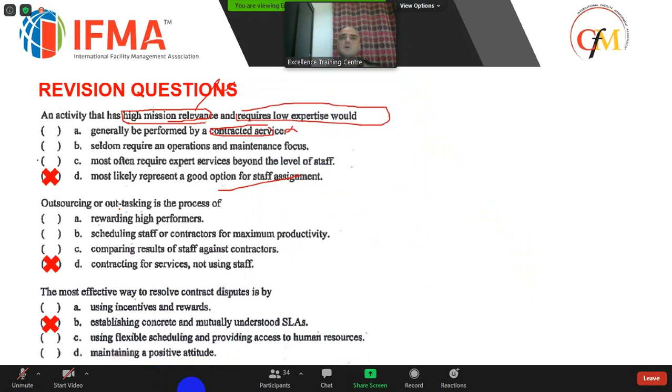The most effective way to resolve contract disputes is by having a clear SLA, option B. If you have a clear contract which clarifies what's expected from you, what you should do, and how you will be measured, conflict is reduced because you understand what's expected from you.

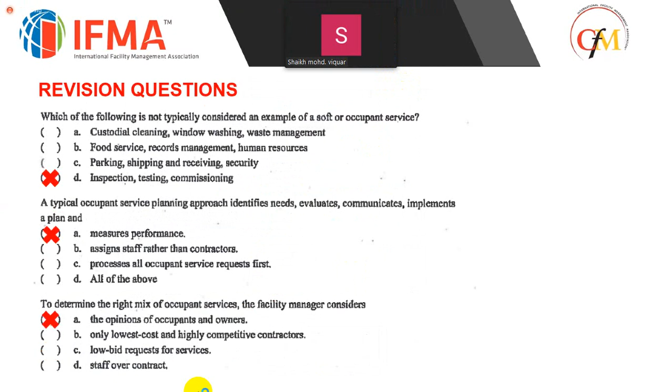Who determines what needs to be done? You are deciding. You are having a resort, okay, and you want to see what to consider, so you consider the opinions of occupants and the owners. These are the stakeholders in this. The other options are only lowest cost, highly competitive contractors, low bid requests for services, or staff over contract. How do you decide if you want to include, let's say, any kind of service, a custodial service or a valet parking service? You are considering the opinion of the stakeholders.

Occupants, yes sir. Okay, thank you. Ahmad, you have a question?

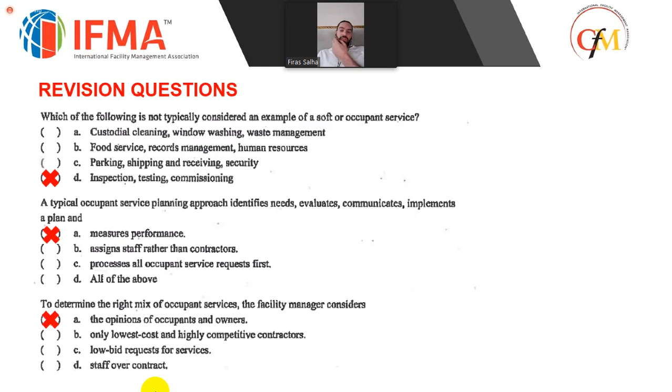I just want to add something, Mr. Baha. Basically, from my experience, he should first identify what specialized service he has and understand the DLP, because some systems vary from others. For example, elevators—the DLP covers preventive maintenance and corrective. Chillers—they cover only the spare parts, they don't cover preventive maintenance. So you have to understand the DLP first, and based on that, suggest to the client what needs to be done.

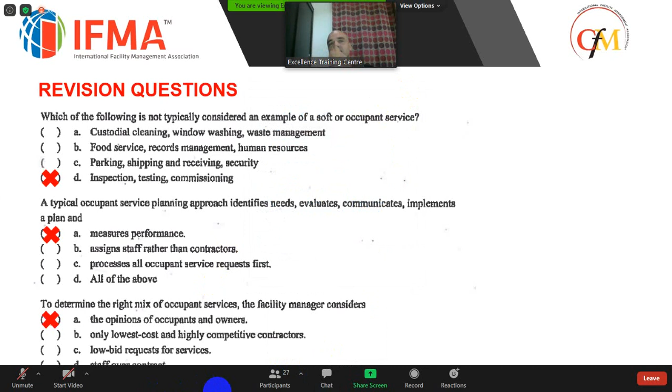Yeah, for sure, that's the basis. But what he's saying is the client is looking beyond the DLP even, and wondering if he has the capacity to handle it. So basically what the client needs, as you said, he's asking for a design—and this is typical, they think that the construction people will know how to maintain it. I come from both fields, and I know it's quite a different field between the two.